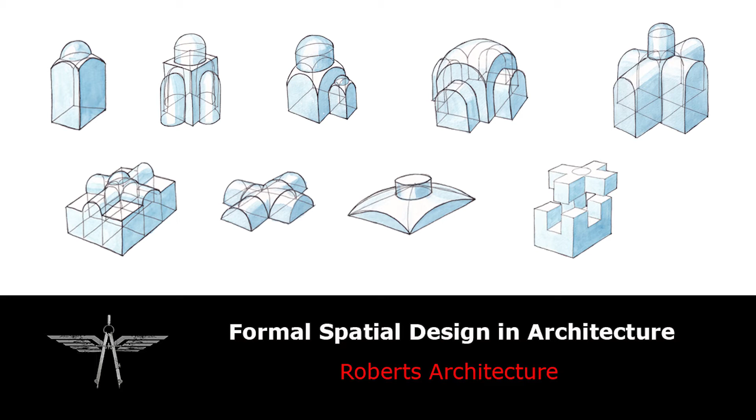Louis Kahn once said, "Architecture is the thoughtful making of space." There is an art of composing spaces that creates spatial and aesthetic relationships. This is the art of architecture.

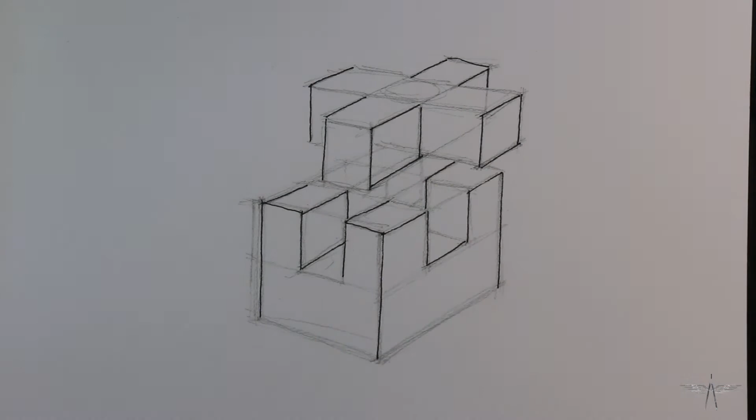Today, so few buildings have a thoughtful composition of space. Space today is created as an afterthought to the functional, structural, and economic requirements of the building. At best, these modern spaces are just a bunch of rectangular boxes arranged in a floor plan. We must look back to the history of architecture to see truly artful compositions of space.

Here is an analysis of Bramante's St. Peter's from a sketch by Leonardo da Vinci from his sketchbooks.

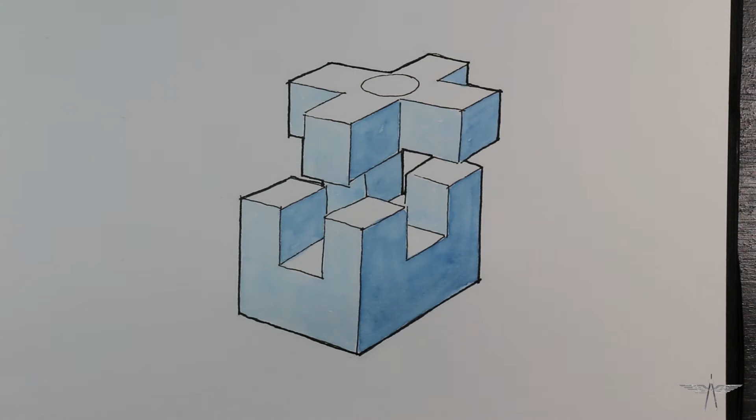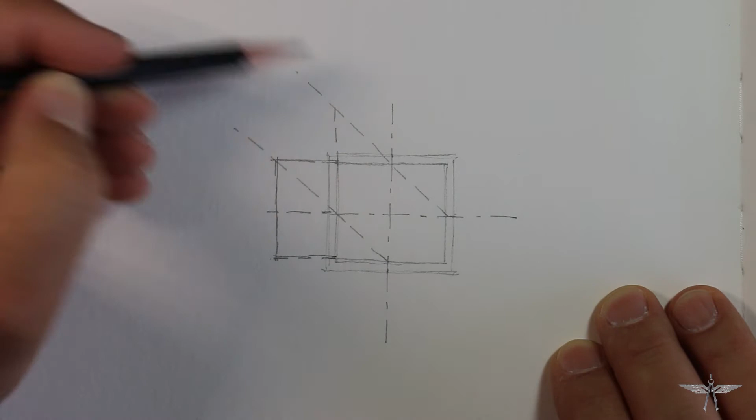Formal spatial design comes to us from the Egyptians, Greeks, and Romans. During the Renaissance, formal spatial design reached new heights as architects and artists developed new ideas for perspective and geometric design. They got many ideas from studying Egyptian, Greek, and Roman precedent.

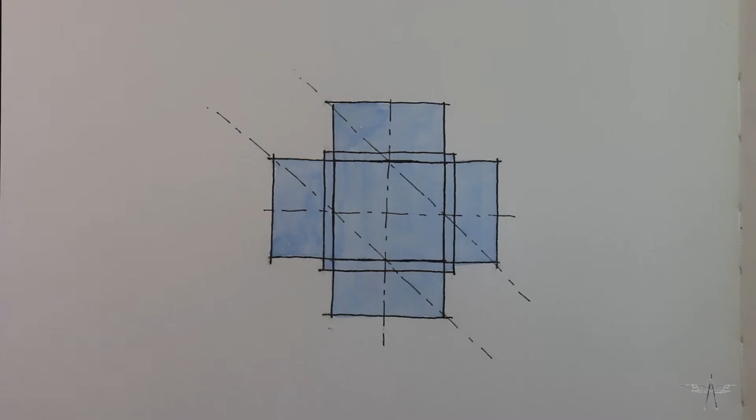The word formal here means that the design is started from a three-dimensional geometric form: cubes, spheres, and cylinders. Often the design is started in 2 dimensions as a flat geometric figure and extruded up into 3 dimensions.

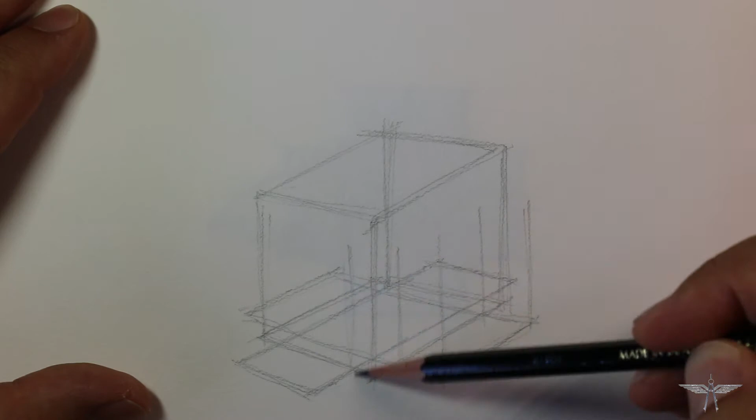Formal geometry had special significance apart from just the form itself. Platonic solids, since Greek times, represented forces of the universe. In the Middle Ages and into the Renaissance, there was much importance paid to sacred geometry, especially in church architecture.

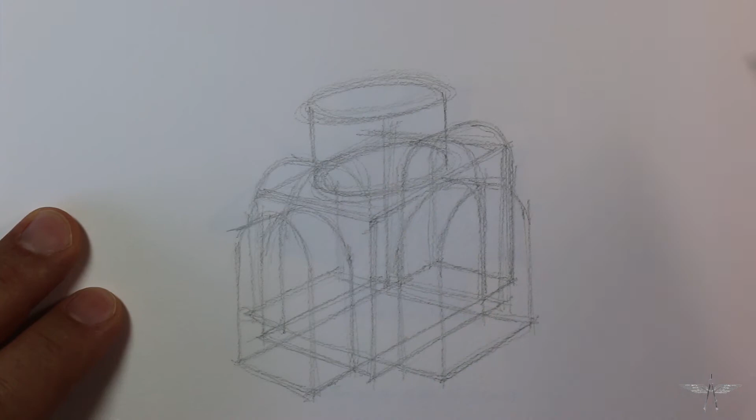Often the geometric forms represented a vast wealth of other ideas and principles. Geometry wasn't just abstract forms, but rather a visual language of meaning. Church architecture's visual language was meant to represent the cosmos. The cross-shaped interior spaces held supreme symbolic and mythical significance.

During the Renaissance, architects and artists looked back to Roman and Greek architecture to create a language of geometric forms that were rooted in classical history. The Romans in particular had perfected spatial design in buildings and cities, and there was much to learn from them.

This is one of the first Renaissance churches designed on a Greek cross plan. It is a concept which merges an aspiration for spatial centrality with the symbolic religious references to the cross. 4 equal rectangular extensions are joined to the square central space called a tribune.

The centrality of the square is emphasized by the dome above. The pure geometry is based on the circle in a square and controlled by the simple 1-to-2 proportional relationship. The whole composition resembles a cross with 4 equal arms.

A simple hierarchy of the plan is reflected in the articulation of the volumes, as the sequence of spaces decreases in size as the eye moves downward from the highest point of the dome to the base of the building.

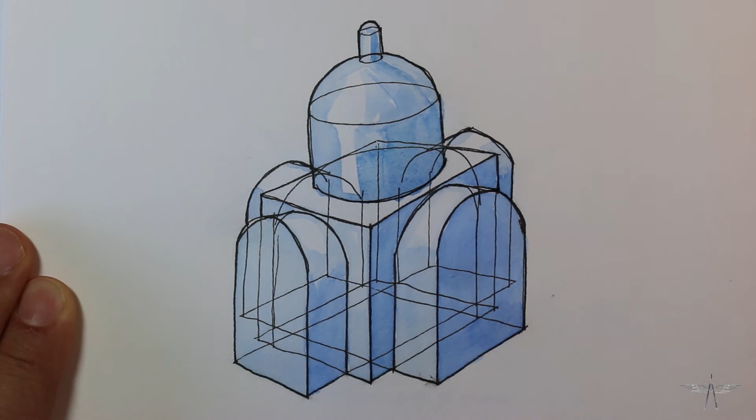Geometry. The square or cube as a geometrical object most clearly communicates the notion of enclosure and is also the symbol of stability. The cube among the Platonic solids symbolizes Earth.

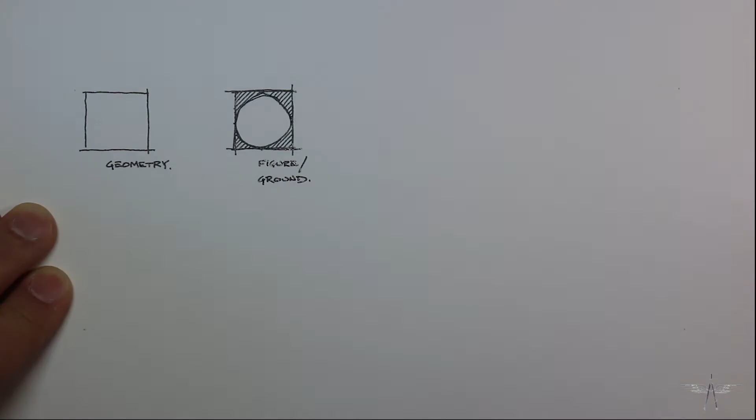Figure ground. Figure ground is the perceptual process of identifying a figure form within a ground form. The figure form becomes dominant while the ground form is in the background.

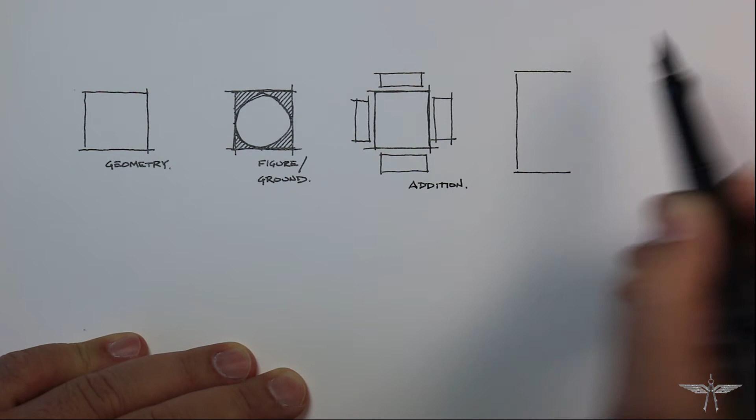Addition. Addition is one of the simplest ordering techniques for geometric composition. The geometric forms are only loosely joined and form an accumulation or group. Their relationship comes from proximity. Often with addition, there is an expressed hierarchy of spatial elements.

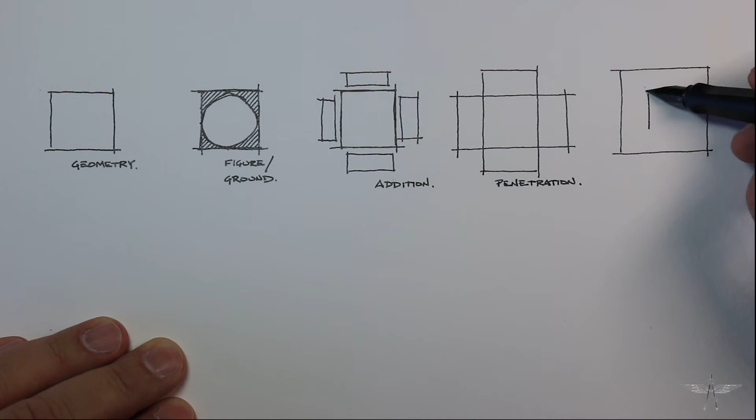Penetration or overlap. Two or more spaces of different forms overlap and merge into a new shape. The two spaces then overlapped retain their independence, remain recognizable, and together create a new spatial form. When two spaces overlap, this creates a space within a space or nesting of space.

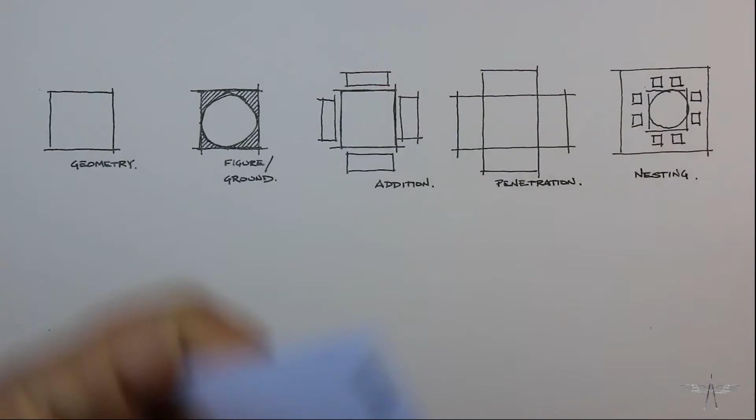Nesting. Geometric forms can be superimposed on other forms. One form then appears to be within another space.

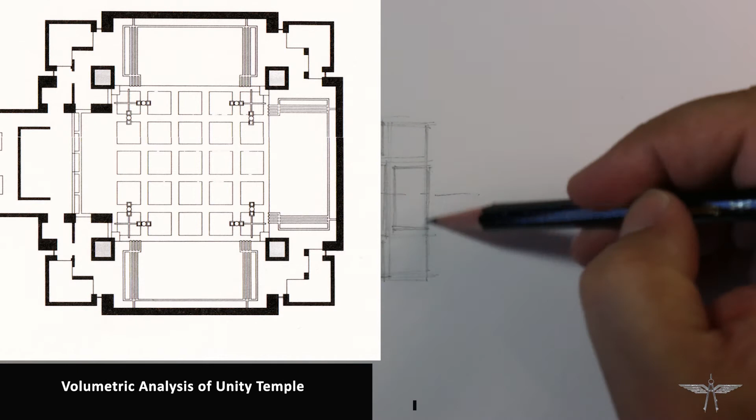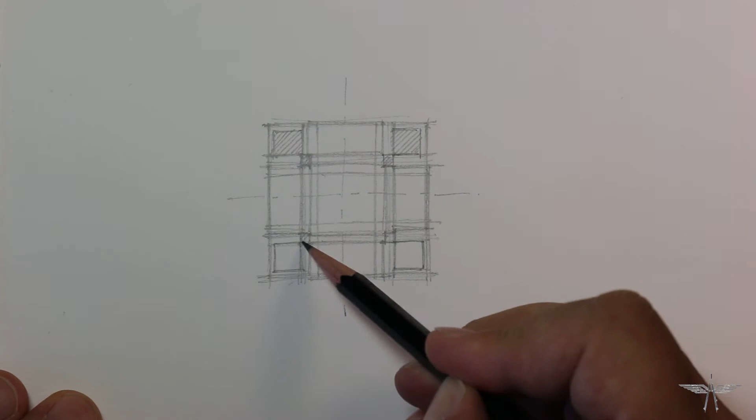Wright believed that making a space or room was the primary intent of architecture. He said, "The reality of the building does not consist in the walls and the roof, but in the space within to be lived in."

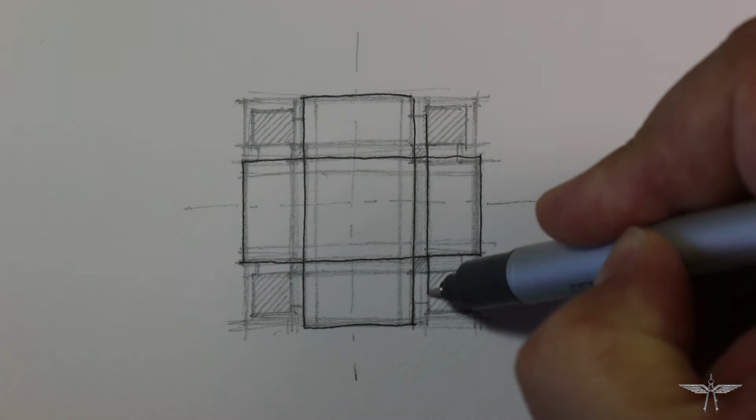The space or room was the generator of architectural form. All other ordering ideas were subordinate to this principle. The spatial investigation of the room was the focus of Wright's work because it's an essential part in the experience of the inhabitant. The room was a place where man was truly embodied in a world of his own making.

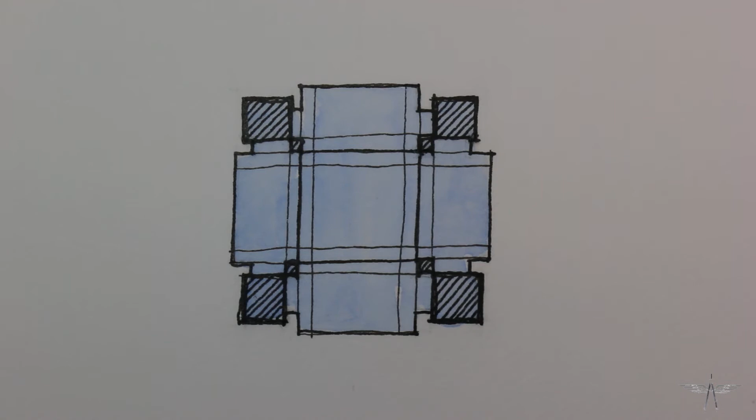Rather than have a pure cube as the form of space, Wright created a dynamic room by fusion or overlapping independent volumes. Wright used the cruciform often in his work.

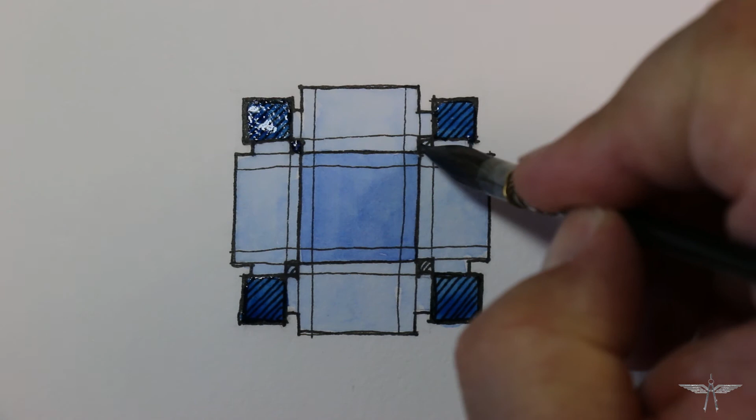This was two rectangular volumes that interpenetrated each other to form a cube at its center. This produces a tension between a stable center and a dynamic extension of space.

The fusion or nesting of several interpenetrating spaces led to a continuity of space, the integration of traditionally separate rooms. This brought an experience of the space that was full of mystery and discovery.

This integration of space required the occupant to decipher, through personal experience, the definition of space. Multiple spatial interpretations could be gained, and a more engaging experience resulted.

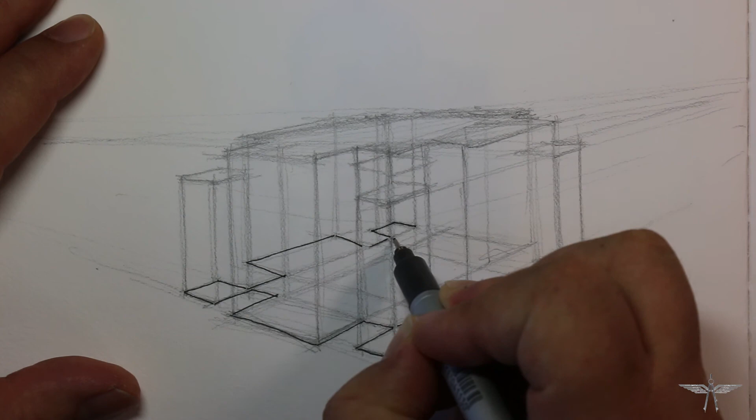Unlike other visual arts like drawing or painting, where the illusion of space is created through various techniques, in architecture, space is actually built. People can move through the space and experience it directly in a physical way. Space is not just purely visual, but physical and tactile as well.

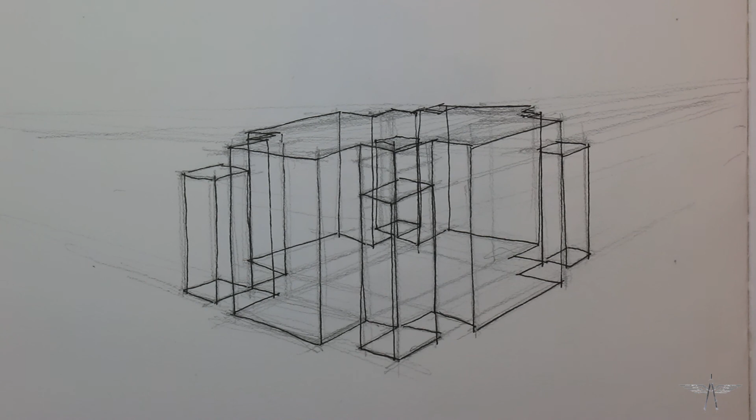Wright's interpretation of the basic elements of architecture were not taken to oppose or destroy the history of the discipline, as did other modern architects. Rather, it was to continue it in an inventive and liberating way. Like other architects from the history of architecture, Wright was fundamentally concerned with the definition and creation of inhabited space.